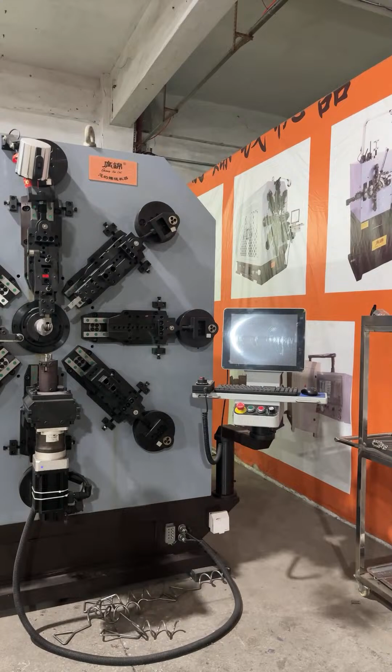Today, Tuesday, October 14th. This is Baker in our workshop. We are a CNC spring machine manufacturer. We are now in the peak season, with many sets of the machine coming for dispatch soonest.

And today, October 14th, this is our workshop. We are a middle-sized CNC spring machine manufacturer. Firstly, let me show you around. This is our workshop for the spring cutting machine and the spring forming machine.

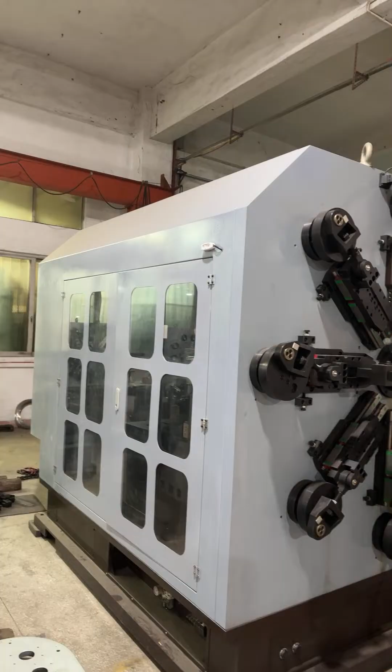We are a professional CNC spring machine manufacturer for the spring forming machine and the spring cutting machine. For example, this is the spring forming machine. To show you around the metal parts used in spring forming, many different types of metal parts, and this area is for the compression spring.

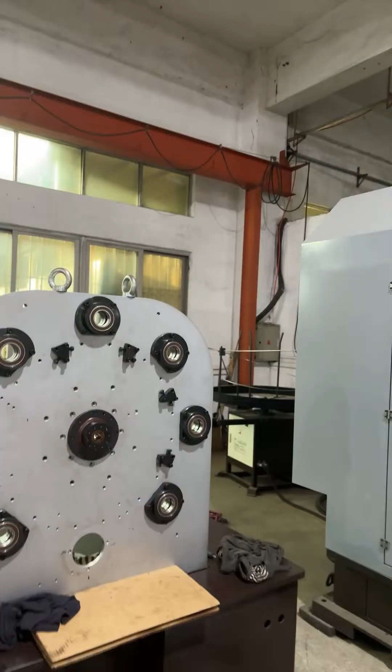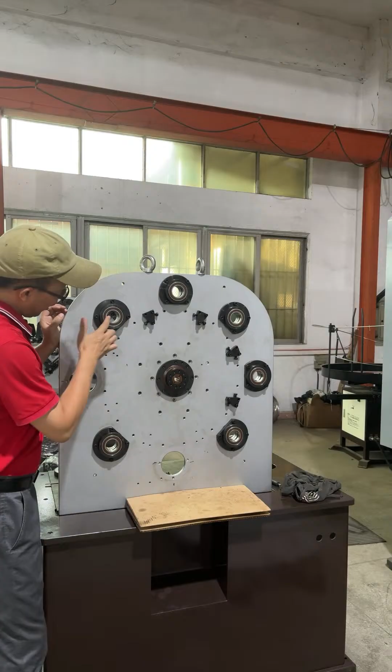We get the order, install the machine, then go next for the sample, fix on the tools, and go to sampling. For example, this one has the work panel and the chassis. This is to be a camless machine with eight handles, the bearing, Japan bearing, and this is for the manual.

The whole set machine: the work panel goes here, the wire decoiler, the main machine to fix on the metal parts and the system related parts. So one full set machine includes the metal, shaft, gears, and the blocks. Here we fix some tools and the system parts, such as the electric parts for power supply, servo, transformer, air switch.

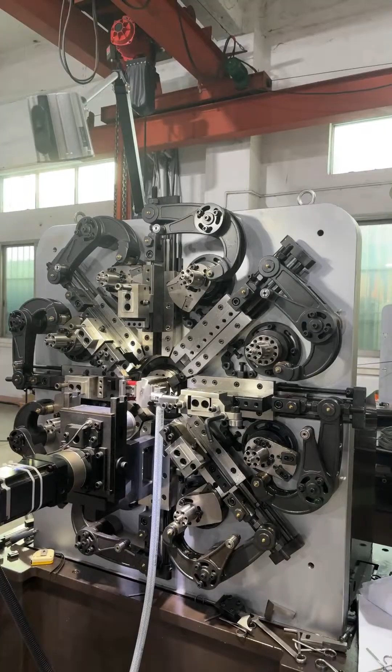So this whole set, the different steps to fix on this machine, take about 5 to 7 days. The heart of this machine is the wire feeding hub. Okay, this is our assembly workshop, and this machine goes up for sampling for products like this.

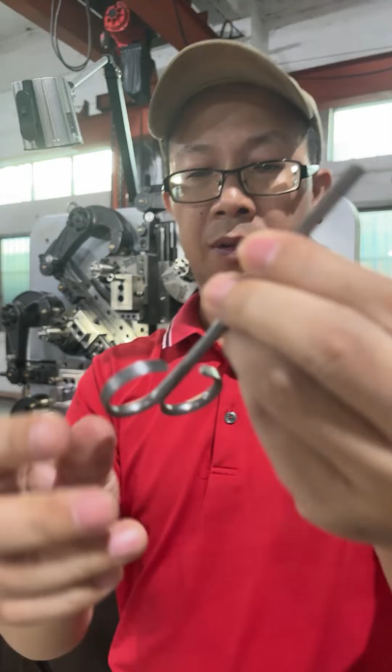Looks like this, a scissor. So the wire is a special shape, not pure round. Maybe it's just less than half, about 40 percent of the whole round wire. So this is a special task.

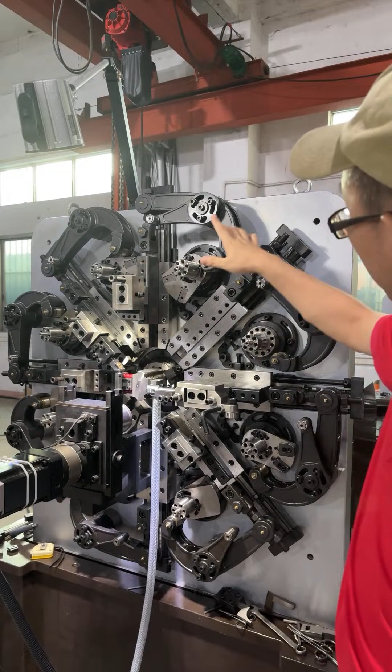On this machine, you can see a lot of blocks, drawers, crane. The cam base shows presently almost 7 or 8 of the handles join this program, including the spinner here. So this is a tailor-made solution. We can provide you the customized machine according to your task, for round wire, for flat strip, or for special wire.

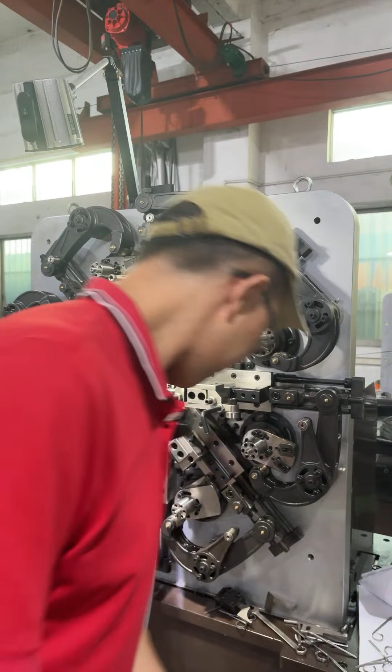This one is special, almost a semi-circle wire, half of the size. So this machine makes, for example, a product like this. Our machine belongs to the spring forming machines, which process round wire and flat, and the materials are different: mostly carbon steel, stainless steel, piano wire, aluminum, and different alloys.

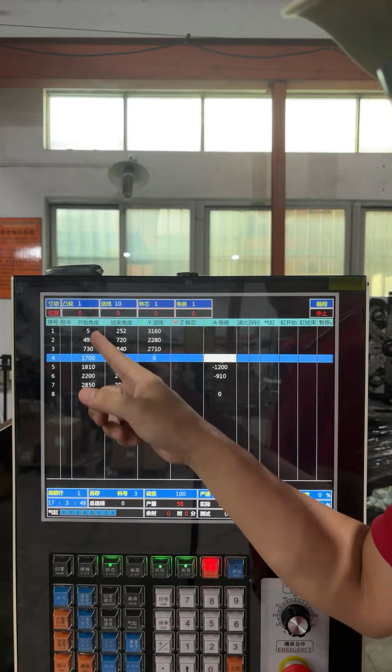And the operating system, let's take a close look at the operating system. Here you can see presently 4 axes in total. Y means the wire feeding, in unit of millimeter. And the spinner, in unit of angle, degrees. So it can measure wire feeding and the spinner.

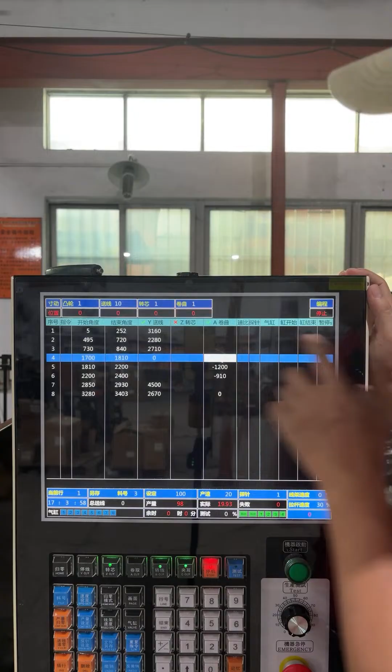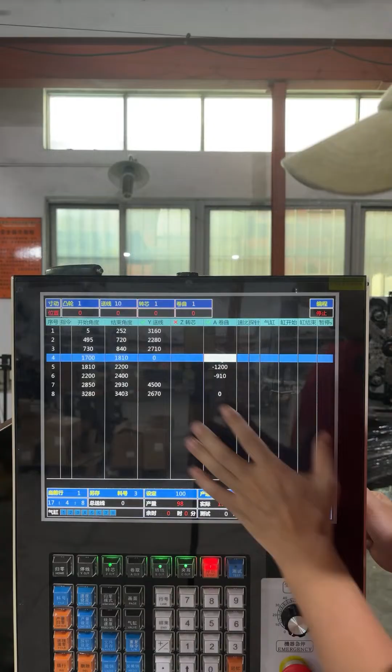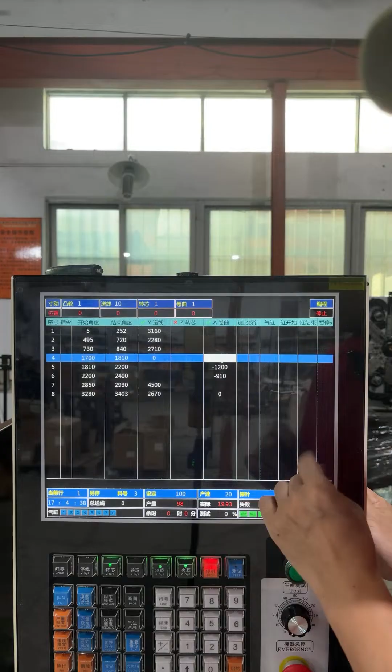Total 4 axes, and the program has different steps. This supports max 6 axes in total. Not touch screen, it's operated by the keyboard, CNC, and the control system can be in English, Chinese, or customized to Spanish, Russian. Spanish for the American countries, and Russian for East Europe and North Asia, especially East Europe, and the Middle East.

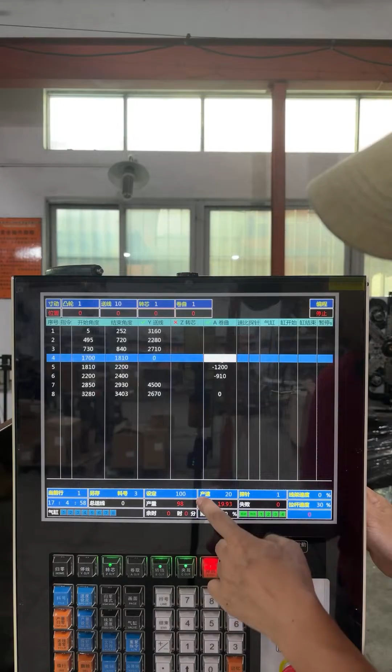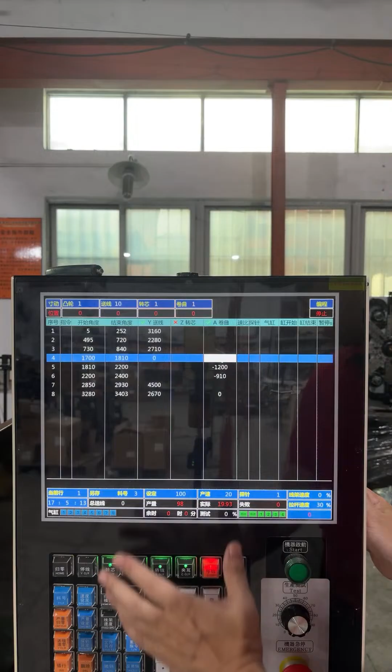So presently, you can see the program to set up the task, to show the total task and output rate. All the key parameters are shown here, and presently the wire feeding rate. So operate by the keyboard, set the parameters. The whole set machine includes the wire decoiler, the main machine, and the operating system.

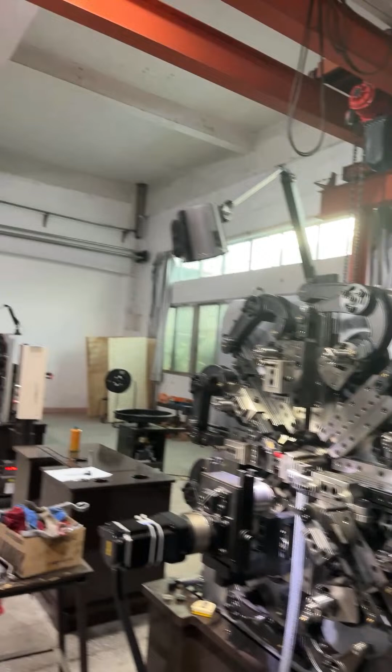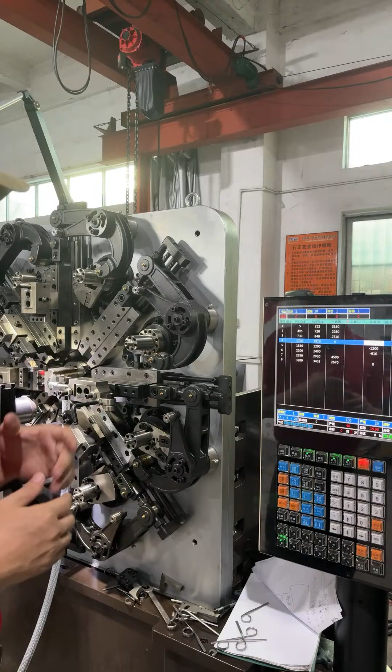After the sample is successful, we will invite the clients to stay in our factory for several days for free usage training, to make maximum use for the client, to make a fortune for the client. Okay, these are tailor-made solutions. And this machine is the heavy-duty spring forming machine with wire rotary.

Okay, let me showcase. Firstly, let me introduce myself. This is my contact information. Our brand, Guangjin Spring Machine, the nameplate, and the basic information. We are a professional CNC spring machine manufacturer. Our factory is located in Dongguan City, just a 1 hour taxi ride to the Canton Fair halls.

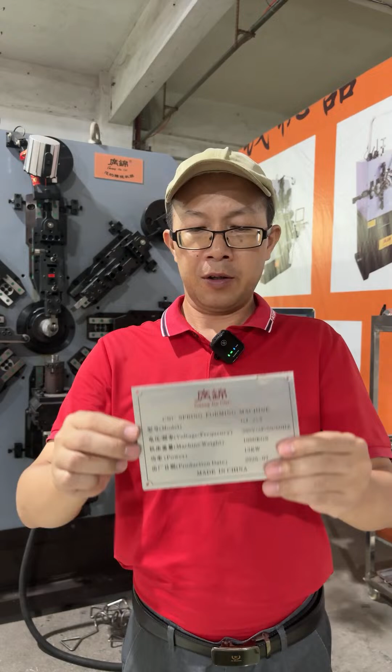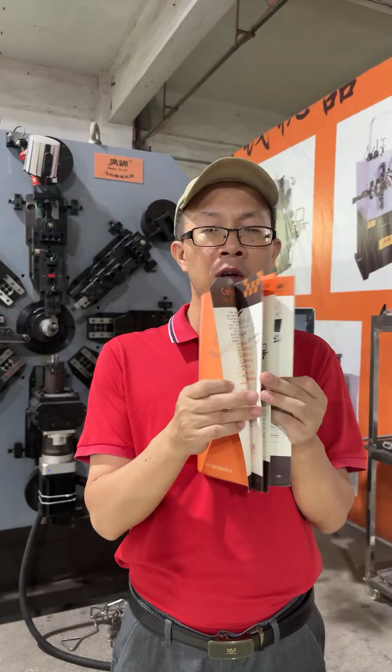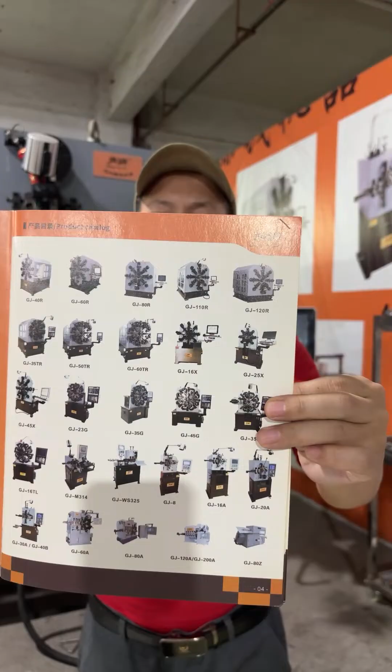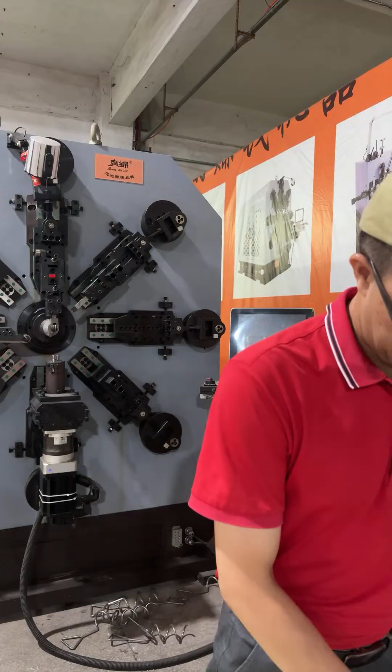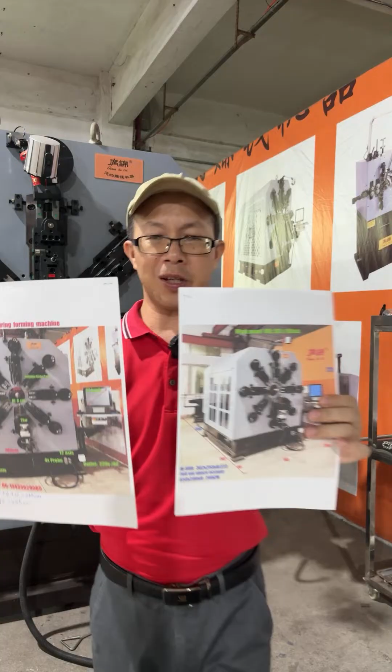For this machine, this one can go for sampling very soon in the coming days. To go sampling, we just need to prepare the wire feeding tools and the special task forming tools. Then we can start the sampling. This machine, introducing the front work panel, different parts, the names and the key figures.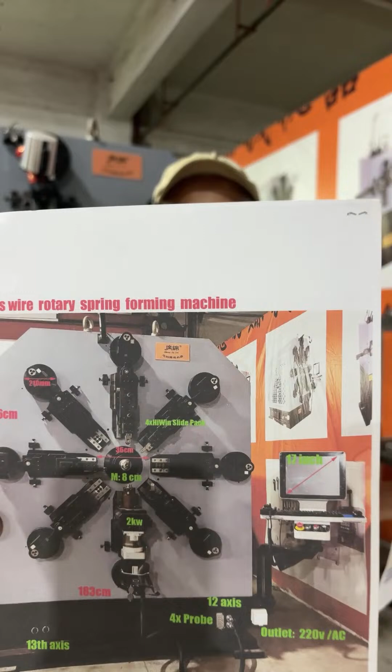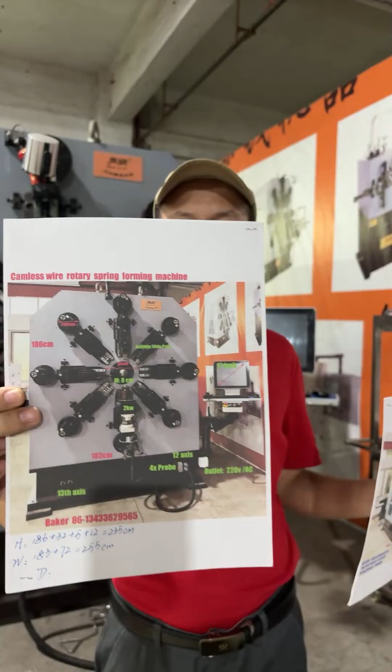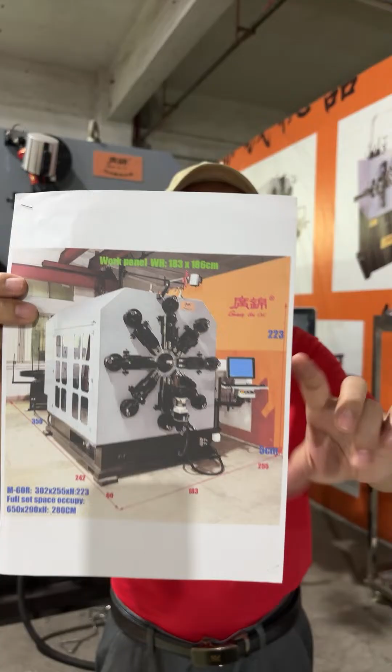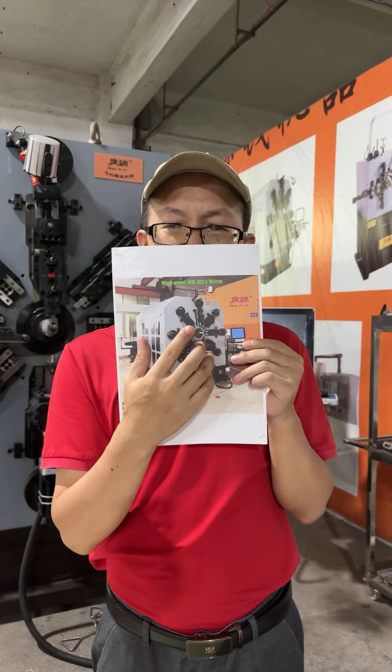Camless wire rotary spring forming machine, this one. And the side view, the whole set machine. This one, feeding wire 3 to 8 millimeter, paired with wire decoiler max load 1.5 metric tons. The whole set machine, the space occupation for the heavy duty tasks.

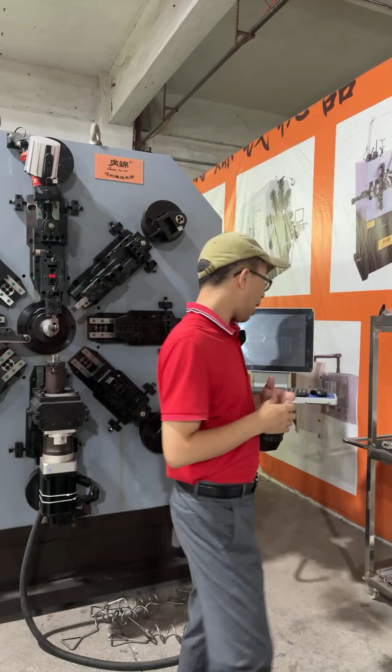So this machine has 3 different sections of different usage. Firstly, for agriculture: spring tines, rake tines, rake teeth, for harvester and straw baler.

Secondly, for the automobile industry: extension springs, or torsion, double torsion springs, brake spring, accelerator pedal or clutch pedal spring, 6 mm carbon steel. By this machine, the output is 8 to 12 pieces per minute. By this machine, 3 to 8 mm feeding wire diameter.

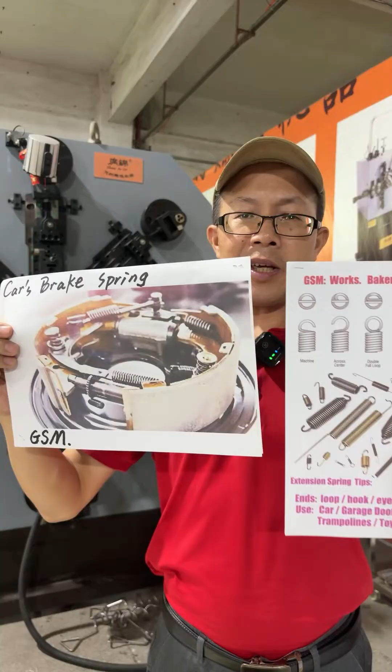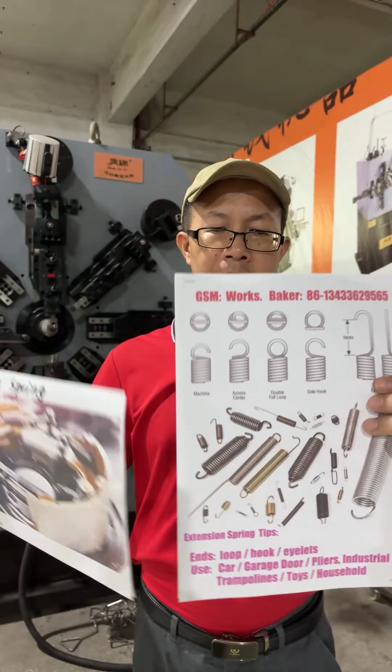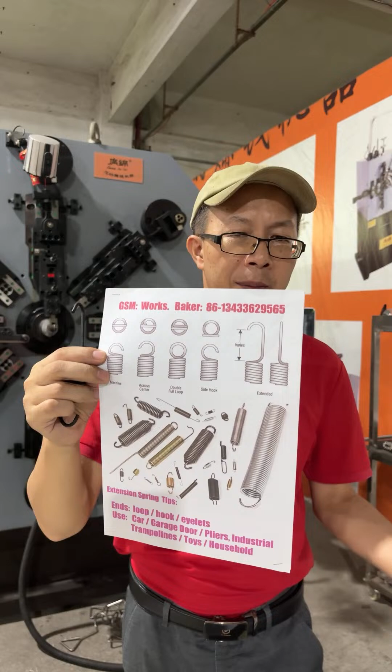And the extension springs are widely used in every type of automobile, every type of car. A lot of extension springs are used in a car. Here's an example. Brake spring, extension springs, various sizes, 3 big groups by the end: by hooks and by eyelet, center hook, or side hook, double hook, or double loop.

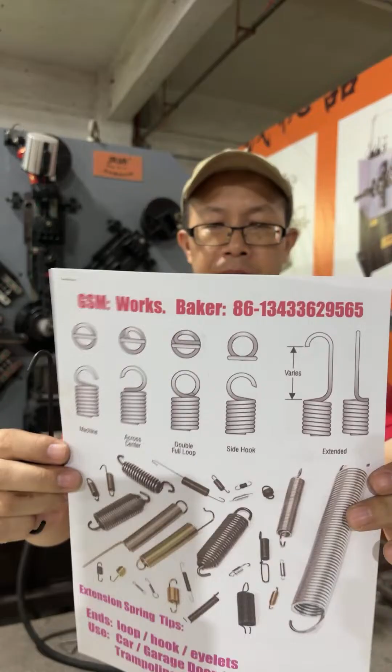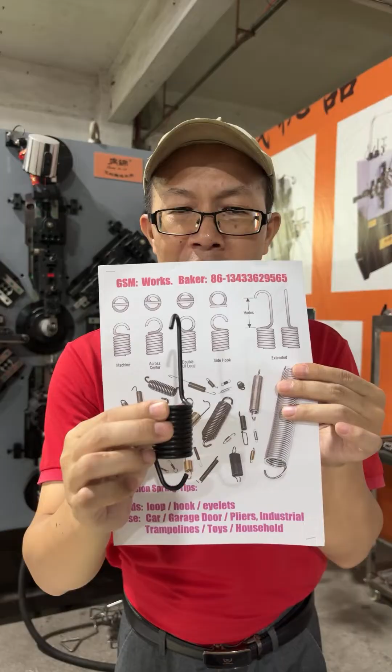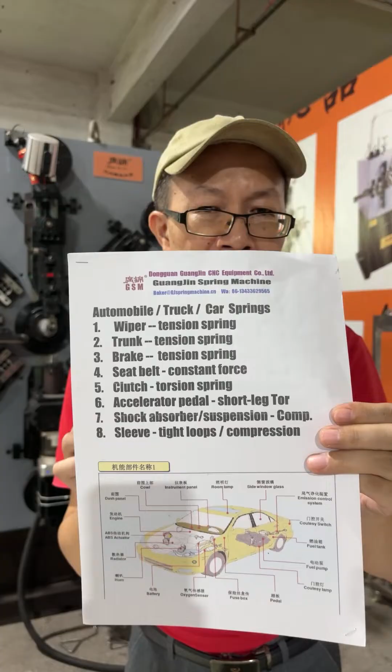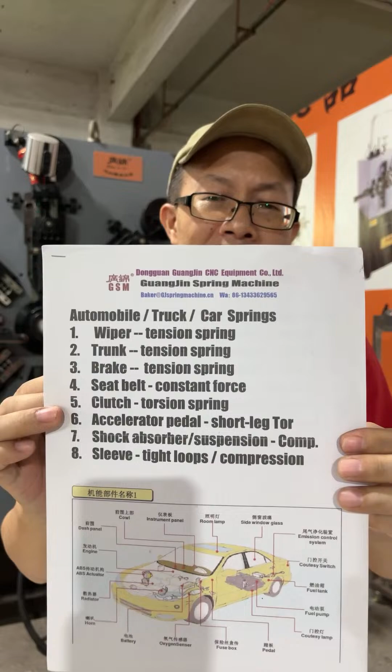This page tells the general basic knowledge about the extension spring from its appearance, from its structure, side hook or center hook. So, for example, every car has a lot of springs. Every car has at least 60 different springs, used for different functions. For example, the windshield wiper extension spring uses wire from 2.8 to 3.5 millimeter.

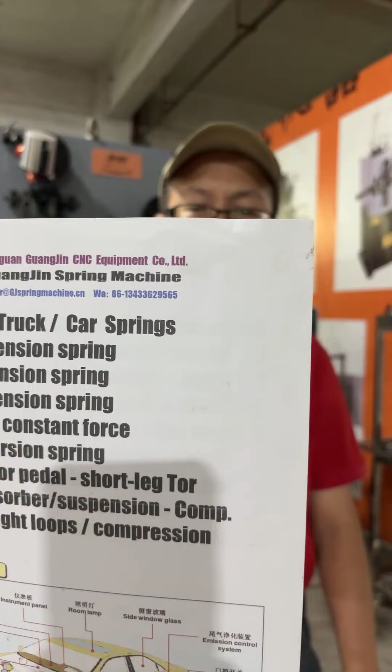So here's showing you the basic knowledge, general introduction to different types of springs used in the automobile industry.

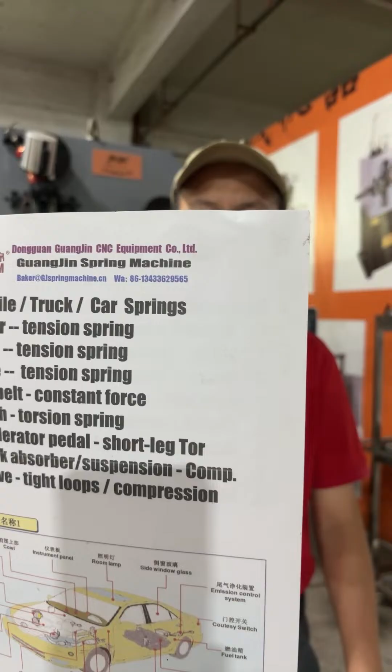This one, the barrel shape, suspension spring used in electric scooter, for a wire from 3 to 6 millimeter.

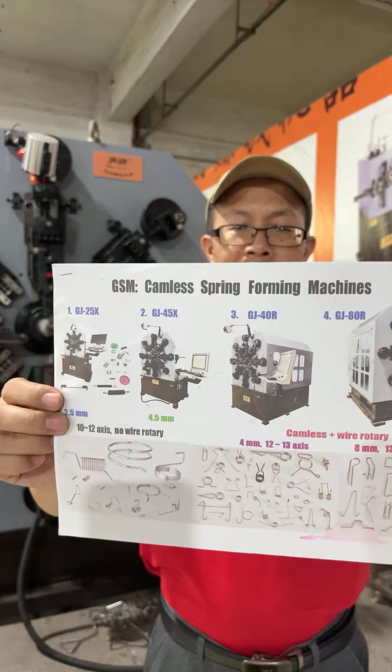As well, the wire forming products. By this time, let me also introduce the camless machines for different wire, different feeding wire ability.

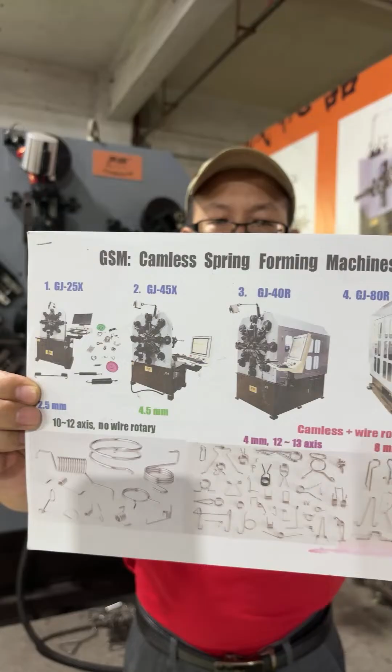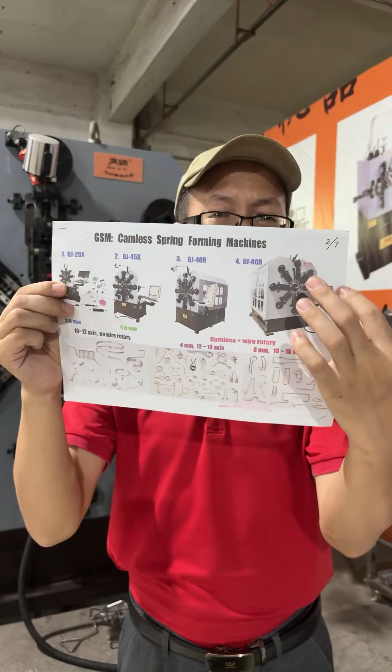All the camless, 10 to 14 axes, mostly 10 to 14 axes. Camless with no wire rotary for a small wire, less than 4 millimeter. And the camless with wire rotary preferred for a task over 4 millimeter.

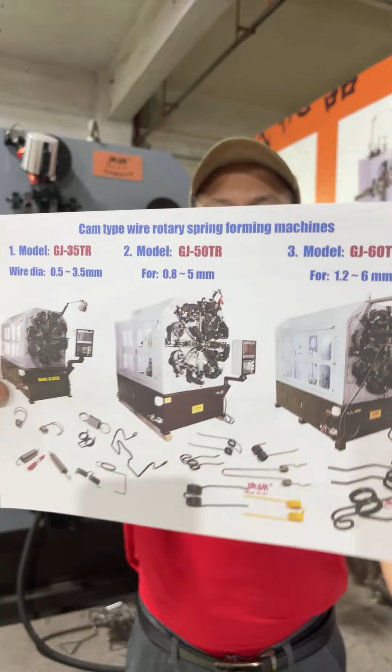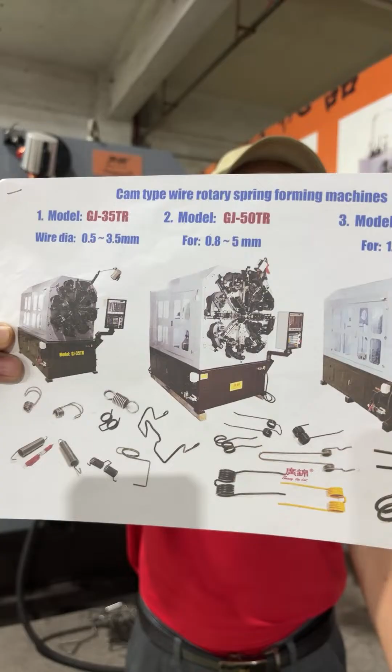The cam base spring forming machine. For agriculture, spring tine, leg tine. For mobile phone holder. For short leg torsion spring. For daily use, simple hooks. For trampoline extension, pull spring used in trampoline.

One trampoline uses at least 16 extension springs, made by material 2.8 to 4 millimeter. Trampoline spring. Trampoline uses extension pull spring.

Once again, this machine is for the purpose of agriculture, spring tine, double tine, hay rake tine, straw baler, harvester, for automobile, for extension spring, torsion, double torsion springs, for wire forming products, irregular wire forming products.

For example, like this, wire forming products. This looks like an AK-47, wire forming, wire bending products. Take a close look at different parts' details.

Wire forming products. By this machine, 12 to 14 axes total. And then for the small wire, we also have the machine in the same setup, but for small wire tasks.

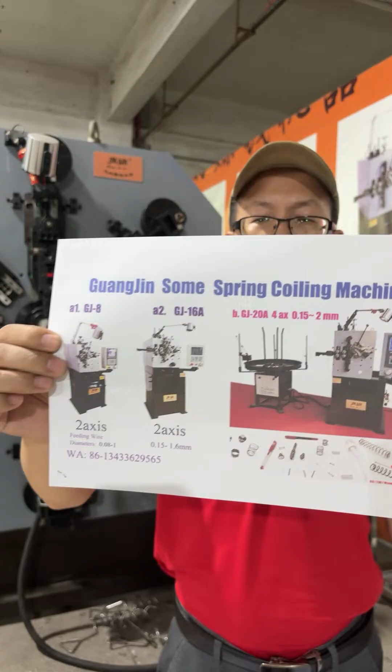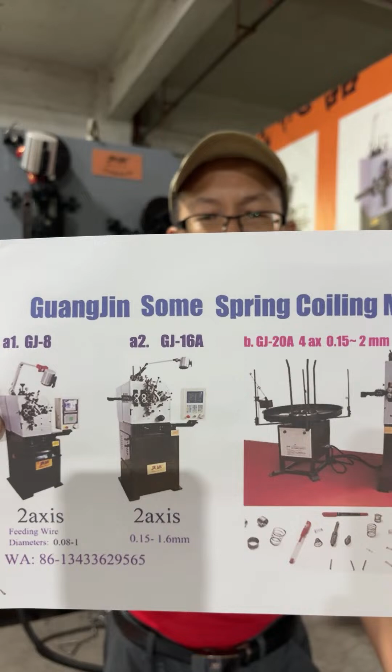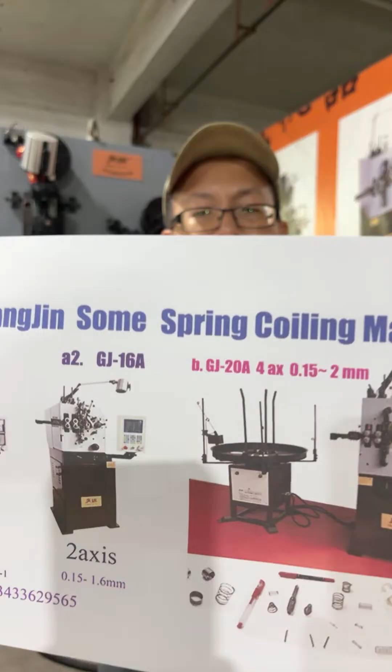Meanwhile, we also have the precise spring for medical purposes, for test instruments. Precise compression spring for the wire, small wire like 0.08, 0.1, 0.15 millimeter. List the compression spring 2 axis or 4 axis.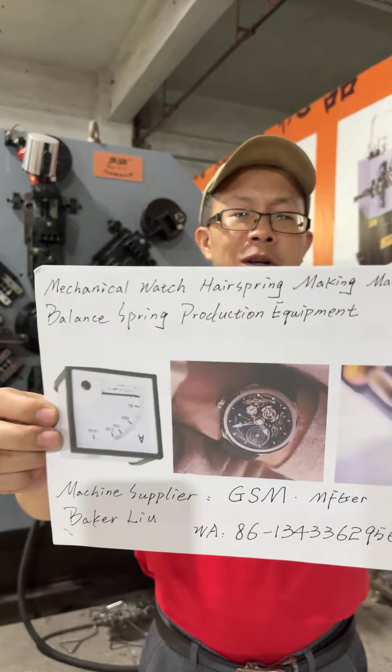For example, the precise spring, the mechanical watch hair spring, a balance spring used in mechanical watch, or timepieces, or ammeter. Hair spring, balance spring in mechanical watch.

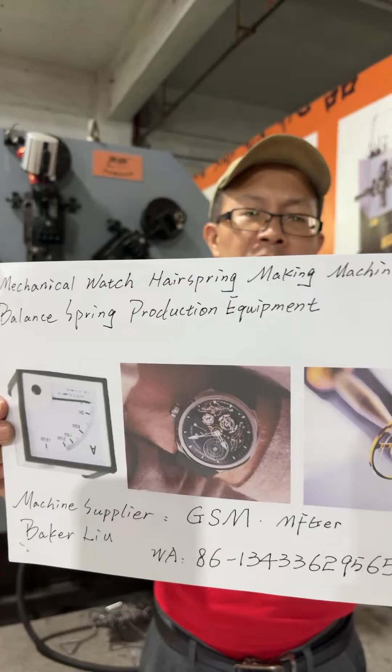Also have the precise spring using as the guide spring for medical purposes. For example, to guide while inserting into the human body's lung or stomach to detect with sensor, inserting into the human body's lung or stomach.

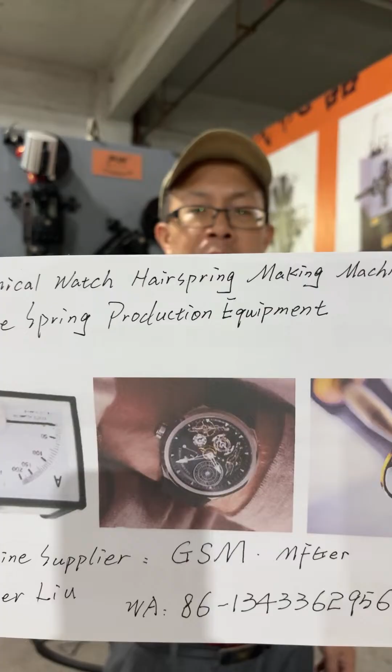For the precise spring, test instrument, medical purpose, or electric products. This one is for the balance spring, for hair spring, used in mechanical watch and ammeter.

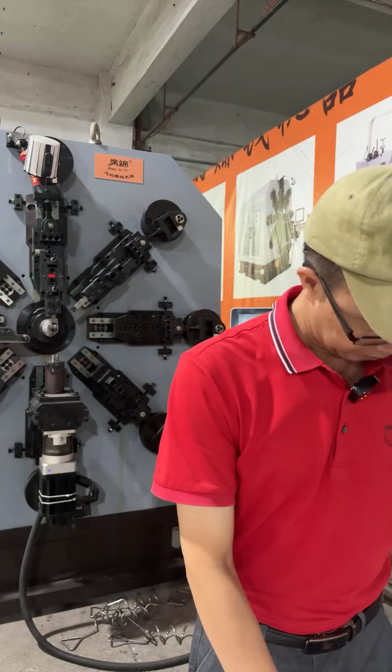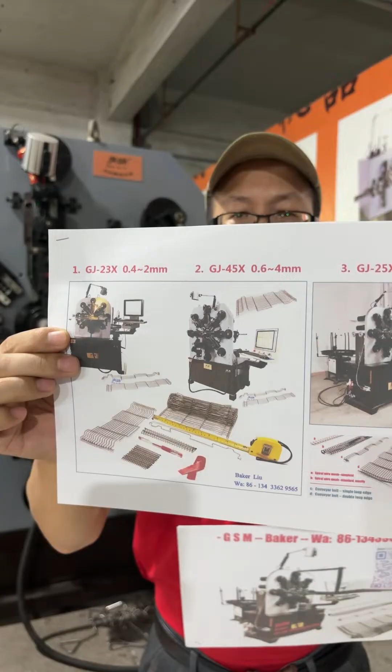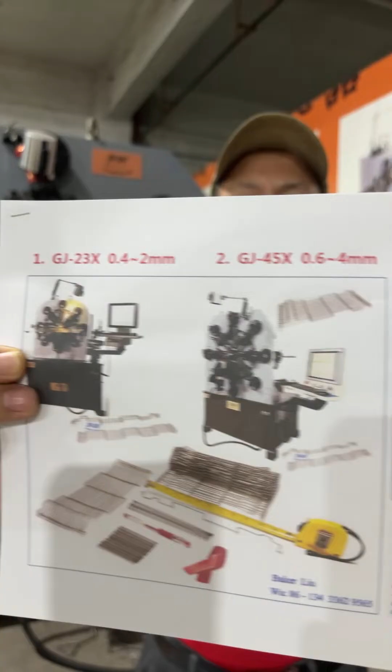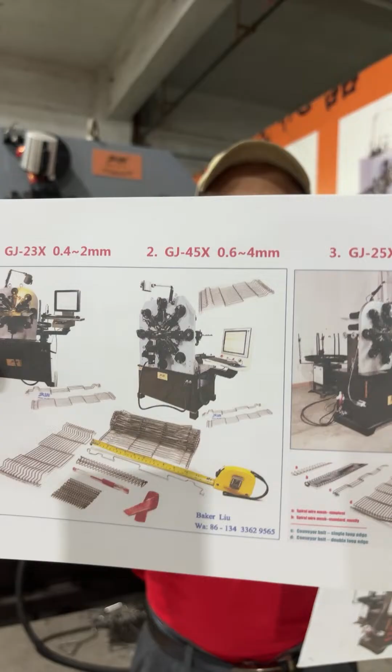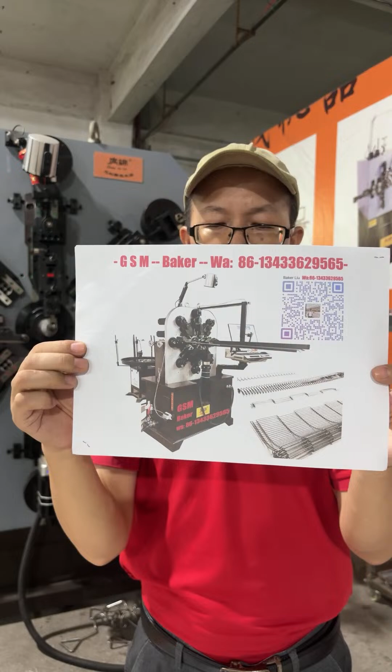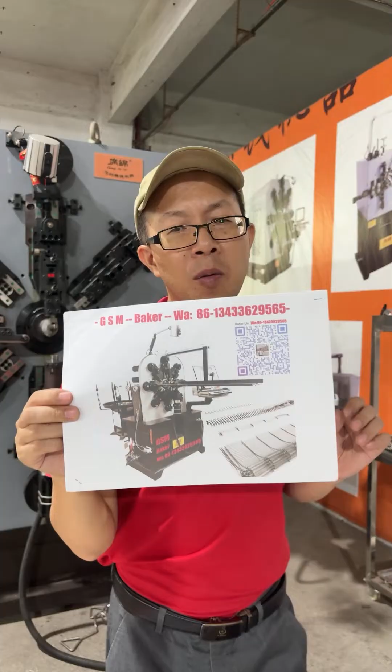We have a lot of sales every year for the conveyor belt, chocolate coating, chocolate enrobing, for the wire from 0.6 to 4 millimeter. For the single unit bending, single unit conveyor belt at length.

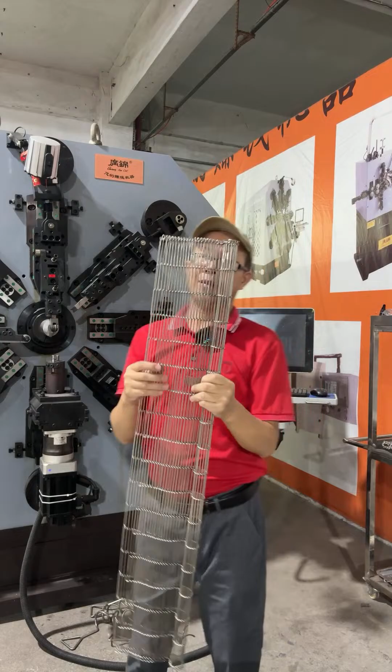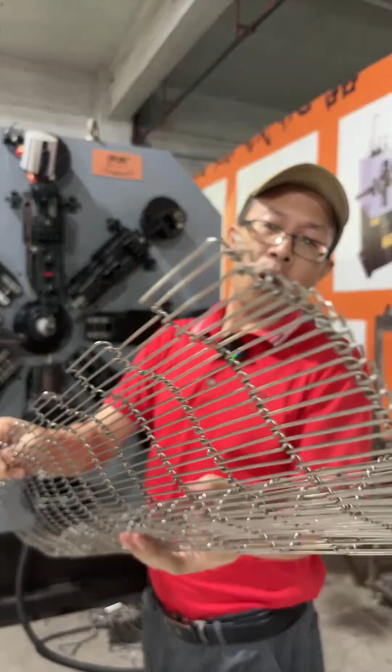Bending a single unit. The structure, take a closer look. Single loop or double loop at both ends. Cubic, 3 dimension, like cubic with arch. Cubic, not the flat one.

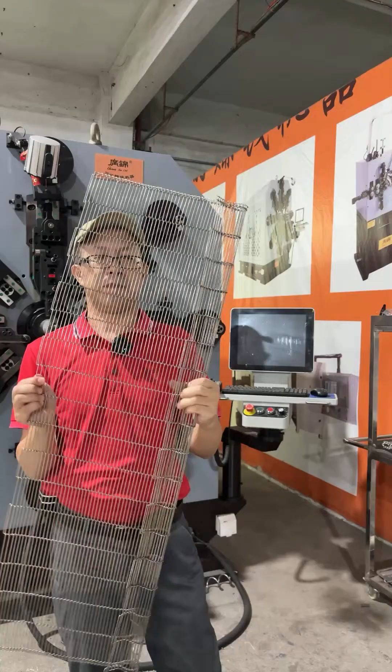The single unit at length, mostly 30 centimeter to 1.2 meter. We can extend the single unit as long as 2.5 meter. This is the spiral wire mesh, spiral wire mesh.

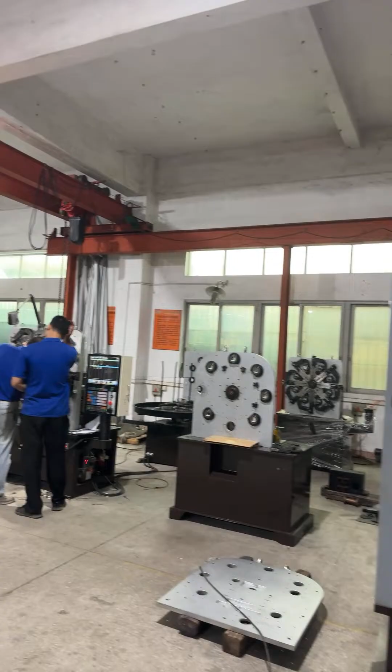Okay, my friend, let me showcase around. This is our workshop for installing the machine for compression and for spring forming machine. We are a CNC spring machine manufacturer in Dongguan factory, spring machine factory with our own brand.